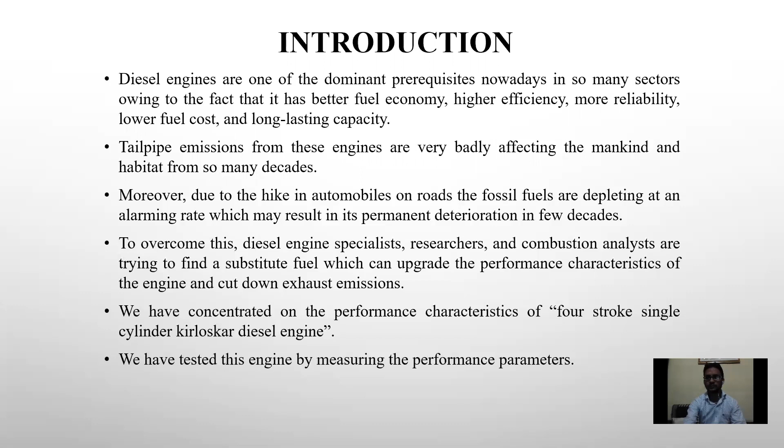And now talk of performance. What does performance mean? Actually, the term performance usually means how well an engine is doing its job in relation to the input energy, or how efficiently it provides useful energy in relation to some other comparable engines. If we want to compare two engines, then the comparison will be done on the basis of performance parameters.

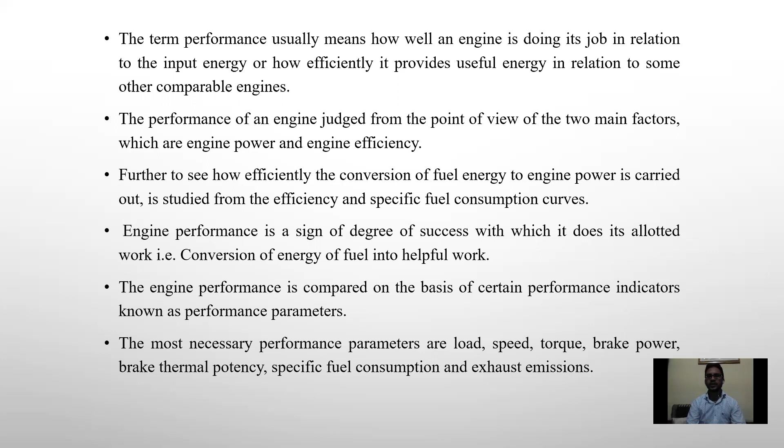The engine which has better performance parameters will be better as compared to other engines, or engine performance is a sign of degree of success, and engine performance is compared on the basis of certain performance indicators. These performance indicators are known as performance parameters, and these performance parameters are load, speed, torque, brake power, brake thermal efficiency, specific fuel consumption, and exhaust emissions.

So this is the working of a four-stroke diesel engine. There are four strokes. The first one is the intake stroke. In the intake stroke, the air will be drawn inside the cylinder, and the piston will move in the downward direction, and the inlet valve will open, but the outlet valve will be closed, and the pressure of the air inside the cylinder will be lesser than the atmospheric pressure.

After the intake stroke, there will be the compression stroke. In the compression stroke, the air will be compressed by the upward movement of the piston, and both the valves will remain closed. And after the compression stroke, there will be the power stroke. In the power stroke, the fuel will be injected, and the air fuel mixture will be ignited, and by the high pressure of the air fuel mixture, there will be downward movement of the piston, and in this stroke, power will be delivered by the piston to the crankshaft through the connecting rod.

And after this power stroke, there will be the exhaust stroke. In the exhaust stroke, there will be upward movement of the piston, and the exhaust gases will go out of the cylinder, and the inlet valve will remain closed, and the outlet valve will open.

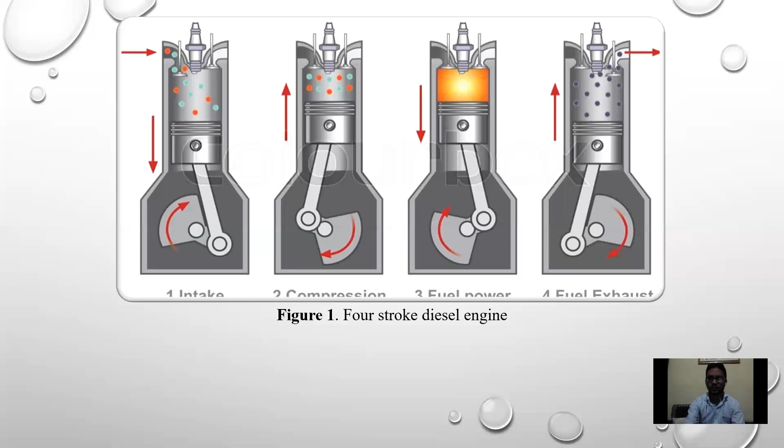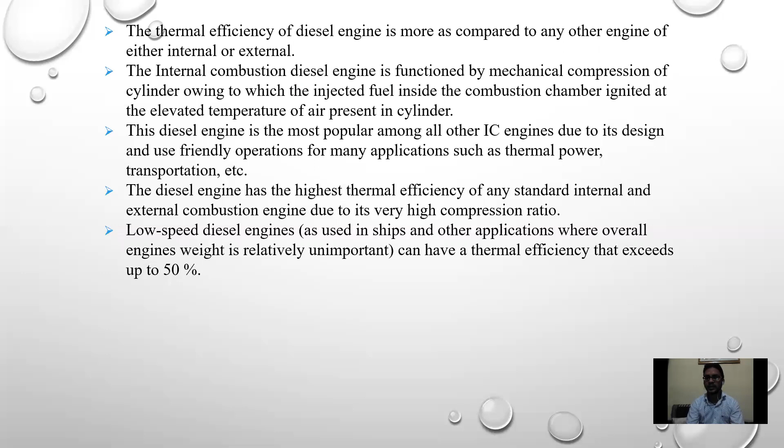Okay. Now talking of thermal efficiency. Actually, the thermal efficiency of the diesel engine is highest as compared to any other engine, either internal or external. Due to the high compression ratio of the diesel engine, the thermal efficiency of the diesel engine has the highest value, and low speed diesel engines can have a thermal efficiency exceeding 50%.

So, literature review. Many authors performed experiments on the diesel engine, and they used different kinds of biofuels and other fuels and biodiesel blends, and they gave their investigations as per the fuel used. So Kaimal and Vijayabalan 2015 performed an experimental investigation on a diesel engine. They used rice bran oil biodiesel and plastic oil, and concluded that the specific energy consumption of the rice bran methyl esters is more than plastic, whereas the thermal efficiency of the engine is lesser as compared to diesel when they used rice bran biodiesel and plastic oil.

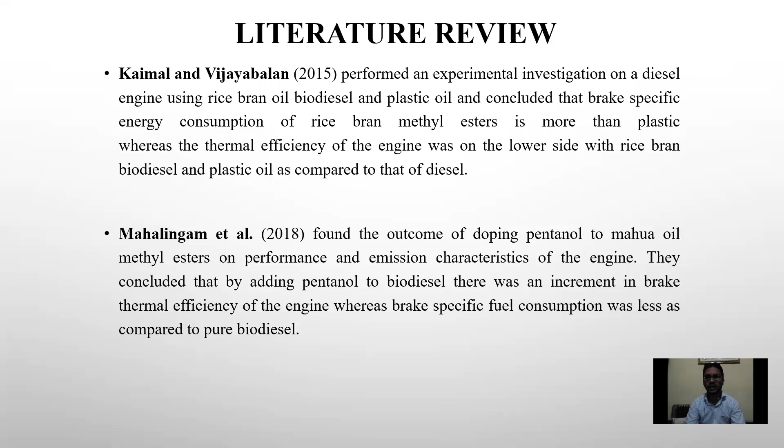Okay, now Mahalingam 2018 found the outcome of doping pentanol to mahua oil, and they concluded that by adding pentanol to biodiesel, there was an increment in brake thermal efficiency of the engine, whereas brake specific fuel consumption was less as compared to pure biodiesel.

And other authors concluded so many investigations. Yadav 2016 investigated that biodiesel can be used in the engine without modification. We don't need to modify the engine. We can use biodiesel in the engine without modifying the diesel engine. Due to the properties of cottonseed oil, smooth operation is possible.

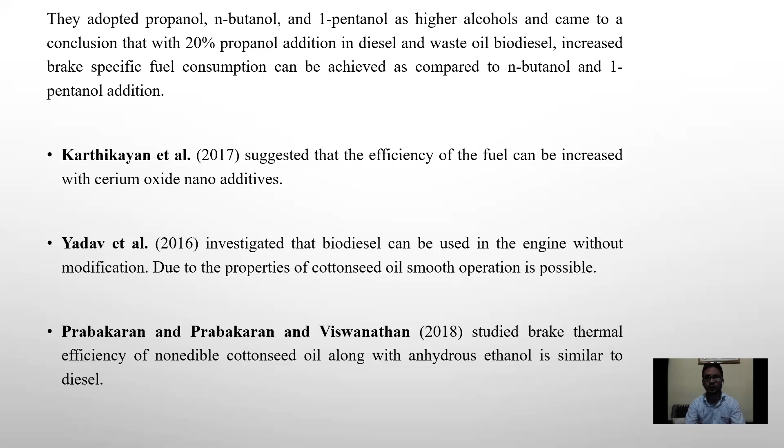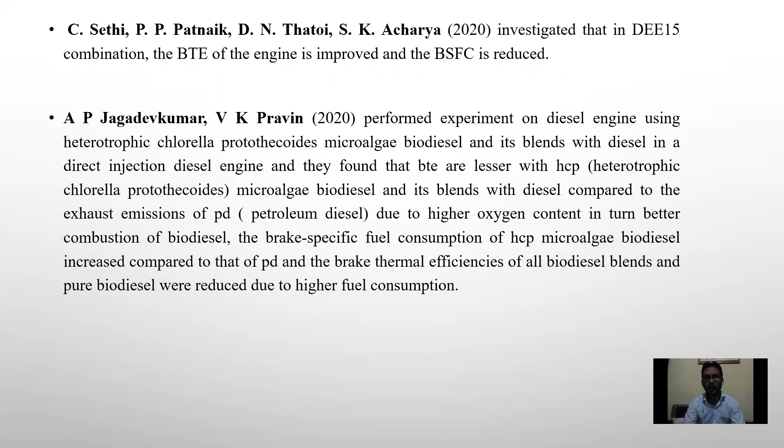So other authors have given so many investigations as per the fuel used. But in our experiment, in our project, we used only diesel in the diesel engine as a fuel. After that, we will be using other fuels like biofuels and biodiesel blends.

And other authors, Sundar K and R. Uday Kumar, studied the performance of rice bran and cotton seed biodiesel blends in a diesel engine, and they found that there is an increase in brake specific fuel consumption, and when the engine operates with both biodiesel blends, performance characteristics like brake power and brake thermal efficiency show very minimal difference, and this is due to similar properties of the tested

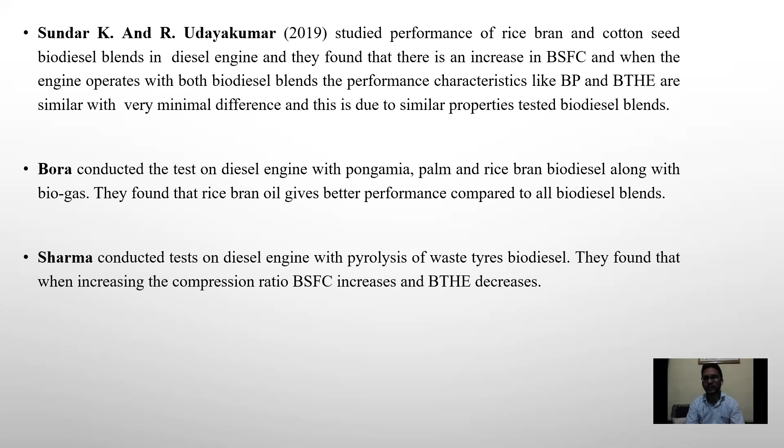So, experimental setup. The experimental setup which we used in our project is used to evaluate the thermal performance of the engine, and the thermal performance parameters are brake power, brake thermal efficiency, brake specific fuel consumption, and exhaust gas temperature. Thermocouples are provided on the setup at different positions, and the simple diagram of the experimental setup is shown in figure 2.

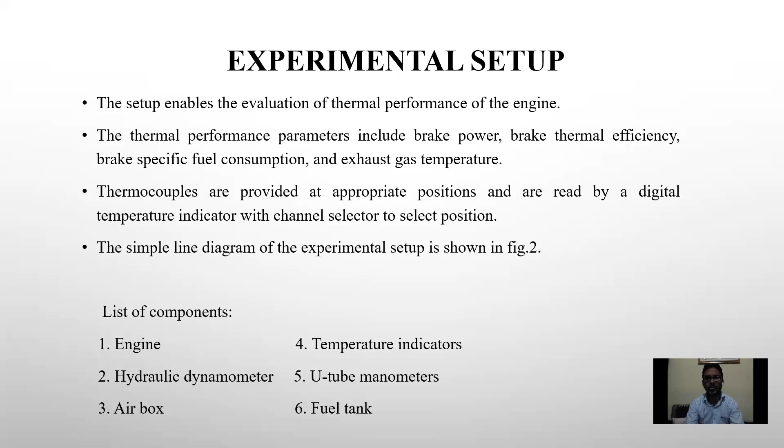And these are the components of the setup, which include the engine and hydraulic dynamometer. In our experimental setup, the dynamometer is a hydraulic dynamometer, and there is an airbox, temperature indicators, U-tube manometers, and a fuel tank. Okay, this is the schematic diagram of the experimental setup. The experimental setup includes the engine and hydraulic dynamometer. This hydraulic dynamometer is connected through the propeller shaft,

and there is a fuel tank in which fuel is filled, and there is a fuel meter which measures the fuel quantity, and there is an air box in which air is coming in and going out, and there is a crank angle disc, and there are T1, T2, T3, T4, T5.

These are the thermocouples. T1 is the thermocouple for measuring the inlet air temperature before turbocharging, T2 is the thermocouple for measuring the outlet air temperature after turbocharging, T3 is the thermocouple for measuring the temperature of the inlet coolant, T4 is the thermocouple used to measure the temperature of the outlet coolant, and T5 is the thermocouple used to measure the exhaust gas temperature.

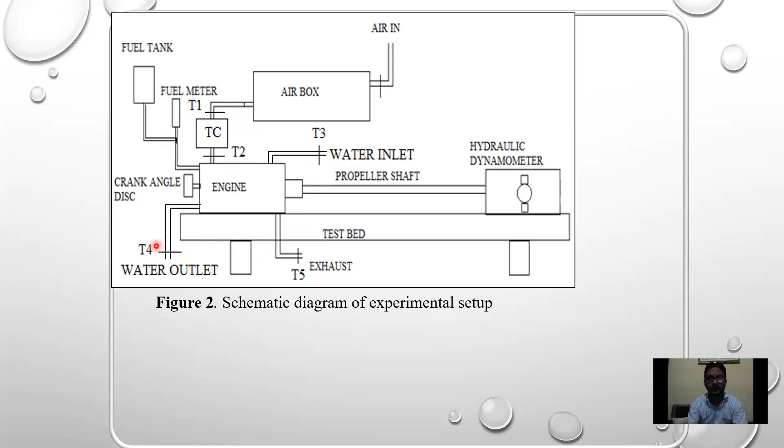And the setup used engine. So in our project, the engine which we used is a single cylinder, naturally aspirated, direct injection compression ignition engine of Kirloskar make, and this is the table of the specification of the diesel engine. Okay,

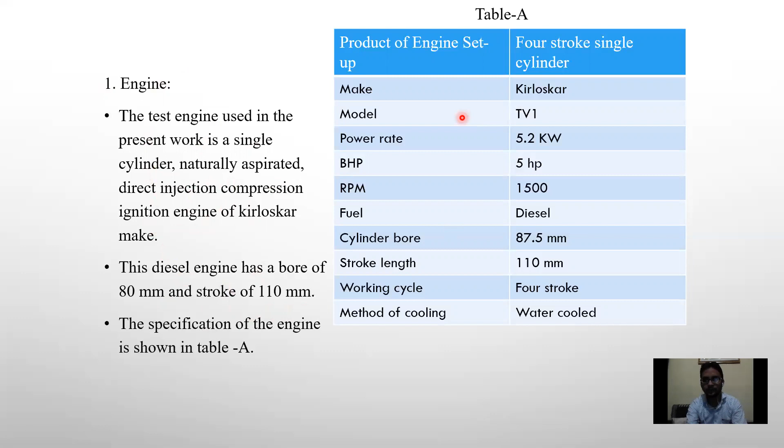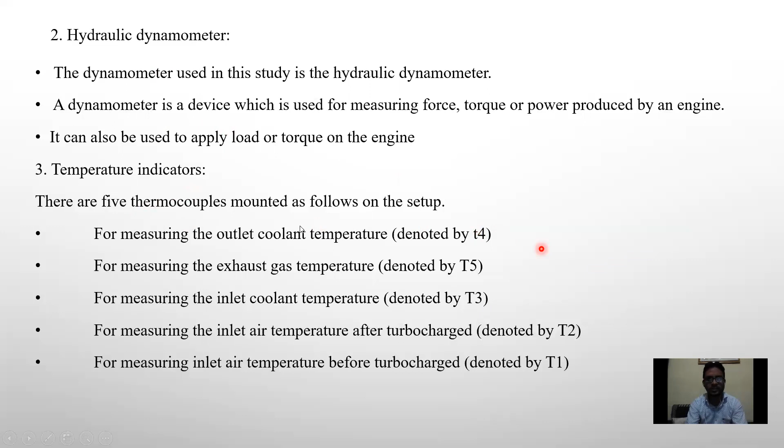now hydraulic dynamometer. In our experiment there is a hydraulic dynamometer. A hydraulic dynamometer is a device which is used to measure the force, torque or power produced by an engine, and it can also be used to apply load torque on the engine. And there are 5 thermocouples mounted on the setup, which we have already discussed.

Now U-tube manometer. We have three kinds of U-tube manometers. One is for the orifice meter, which is used for the mass flow rate of the coolant, second is the air flow meter, which is used for the mass flow rate of the air, and a U-tube manometer for the boost pressure after turbocharging, and there is a fuel tank.

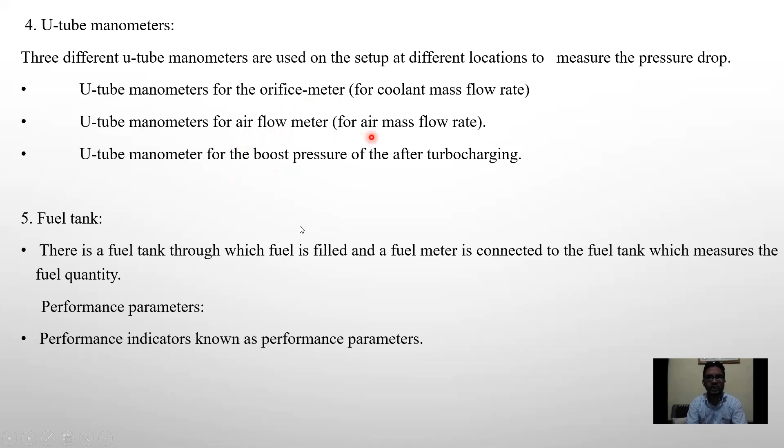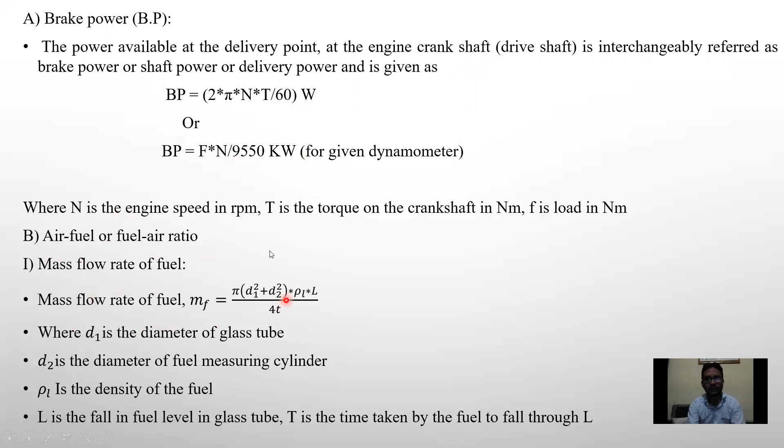So these are the performance parameters. One is brake power. Brake power is the power which is available at the delivery point or at the crankshaft. It is also known as brake power or shaft power, and it is given by BP = 2πNT/60 watt. And air fuel or fuel air ratio. The formula to calculate the mass flow rate of the fuel is given as π(d1² + d2²) × ρL / 4t.

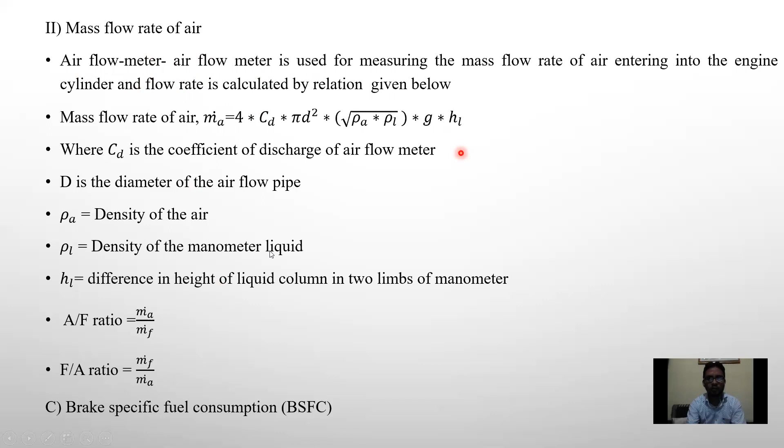Okay, this is the mass flow rate of air. The formula to calculate the mass flow rate of air is given as follows. Now brake specific fuel consumption. Brake specific fuel consumption is the ratio of mass flow rate of fuel to brake power.

Now brake thermal efficiency. Brake thermal efficiency is the ratio of brake power to heat supplied by the fuel, and heat supplied by the fuel is mf × LCV. LCV is the lower calorific value of the fuel in kilojoules, and the higher the brake thermal efficiency, the greater the brake power. Brake thermal efficiency gives us an idea of the power output generated by the engine with respect to the heat supplied in the form of fuel.

If the thermal efficiency of the diesel engine is high, it means the diesel engine is doing its job very efficiently. And volumetric efficiency is the ratio of air intake at atmospheric condition to swept volume.

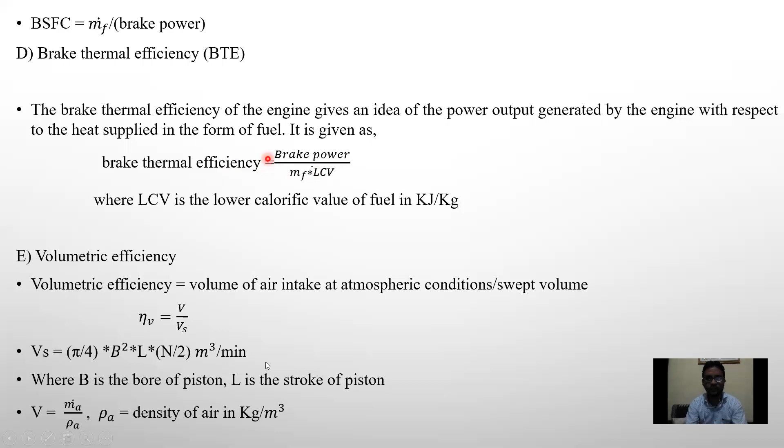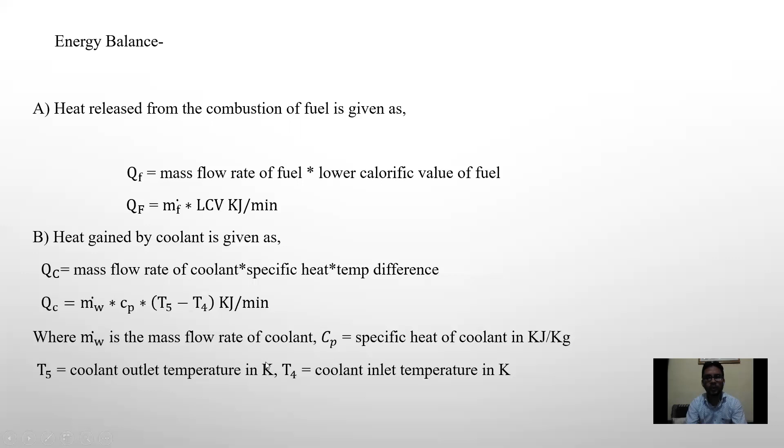Now heat balance. The heat released from the combustion of the fuel is given by this formula, and some part of this fuel energy will be utilized as brake power or useful power, some part of this energy will be carried away by exhaust gases, some part of the fuel energy will be lost in radiation, and some part will be lost in the coolant.

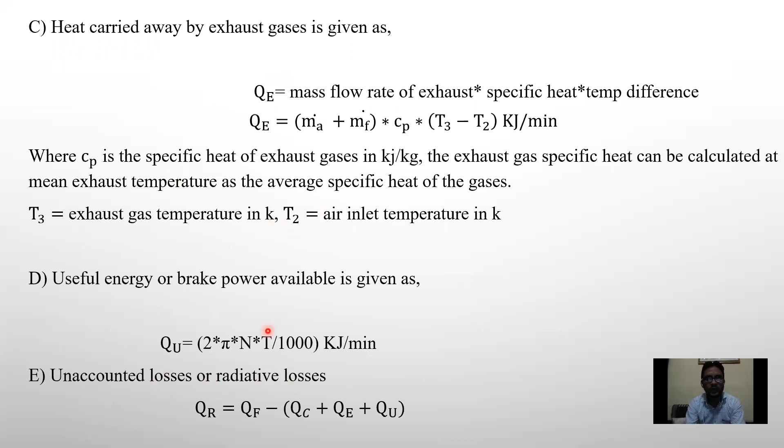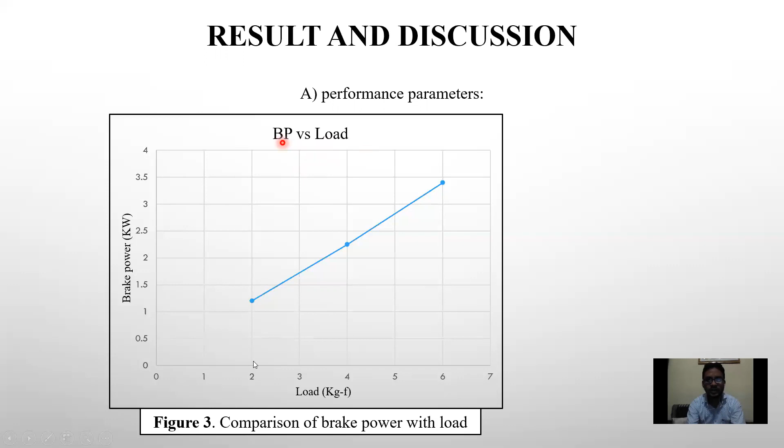Now, results and discussions. These are the graphs. This is the graph of BP versus load, and it is noticed that when the load is increasing, the brake power is also increasing. And this is the graph of brake specific fuel consumption versus load. So when the load is increasing, the brake specific fuel consumption is decreasing.

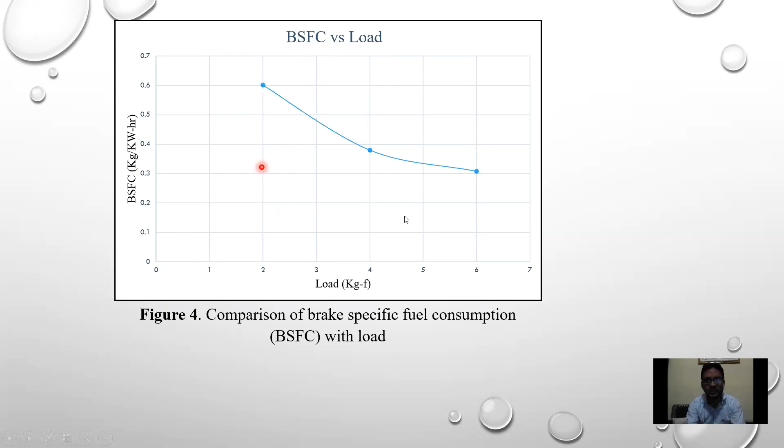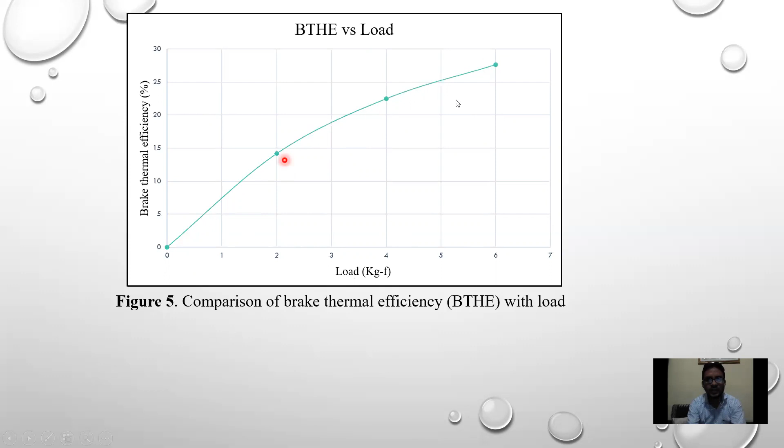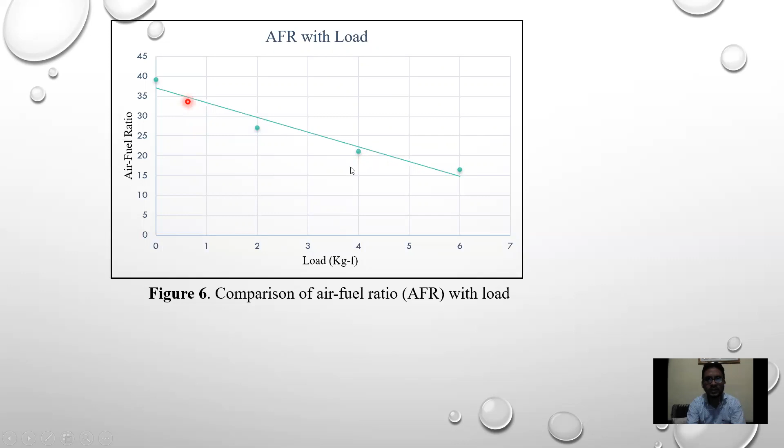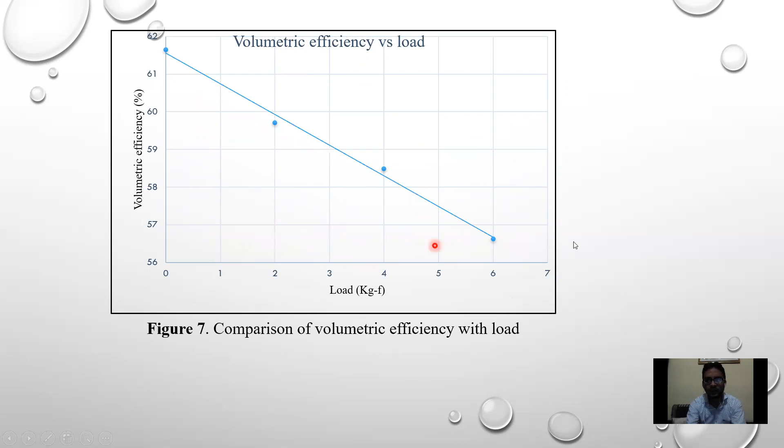Now this is the graph of volumetric efficiency versus load. When the load is increasing, the volumetric efficiency is decreasing linearly. And this is the graph between equivalence ratio and load. When the load is increasing, the equivalence ratio is increasing linearly.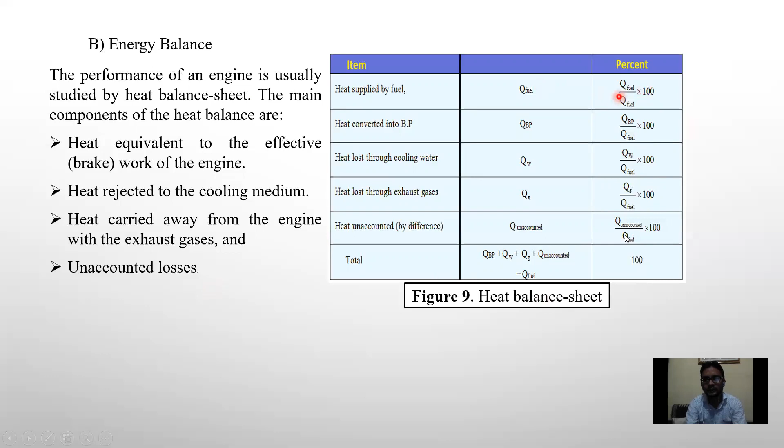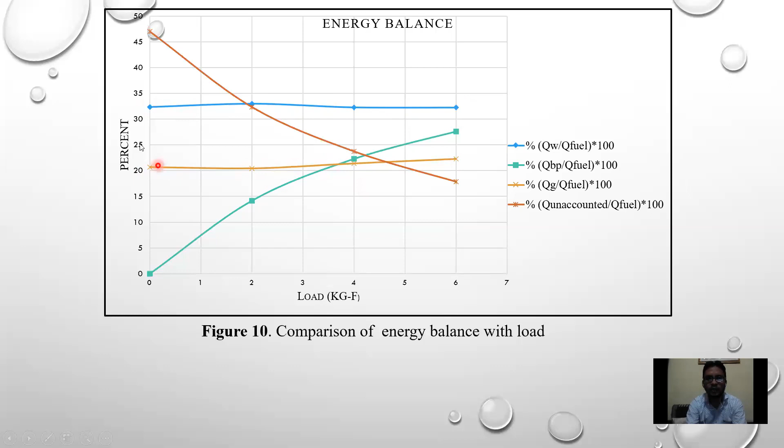Now conclusion and future work. Following are the conclusions based on our experimental investigations. When our diesel engine is operating, it is observed that the brake power is increasing, brake specific fuel consumption is decreasing, and the brake thermal efficiency is increasing with increase in load for diesel. We have already noticed this from the graph.

Okay, it is observed that on increasing engine load, the air fuel ratio is decreasing. As the engine load increases, the fuel quantity increases, thus the air fuel ratio decreases, and the air fuel mixture becomes rich from lean. And this is for volumetric efficiency. And when the engine load increases, the equivalence ratio also increases linearly. We have already noticed this from the graphs. All these conclusions can be seen from the graph.

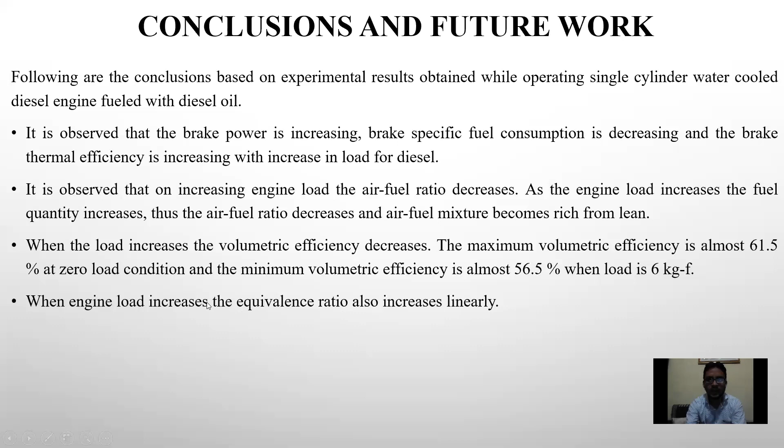And now talking of future work. Firstly, we used diesel oil in our diesel engine, and we tested the Kirloskar diesel engine, 4-stroke single cylinder. So now for future work, we have biodiesel and diesel biodiesel blends for the enhancement of performance of diesel engines. Biodiesel can be used in the diesel engine as a fuel, and diesel biodiesel blends can also be used in the diesel engine. So biodiesel can be added to the diesel in proportions of 5% or 10% or 15%.

So after testing our engine, we will be focusing on the emission characteristics of the diesel engine, because emissions from engines are very badly affecting mankind. So our future work can be conducted by using biodiesel and biodiesel blends to upgrade the performance characteristics and cut down exhaust emissions. So in our future work, we will be focusing on the emission characteristics as well. Firstly, we used diesel in our diesel engine as a fuel. After that, we will be focusing on other fuels like biodiesel and diesel biodiesel blends.